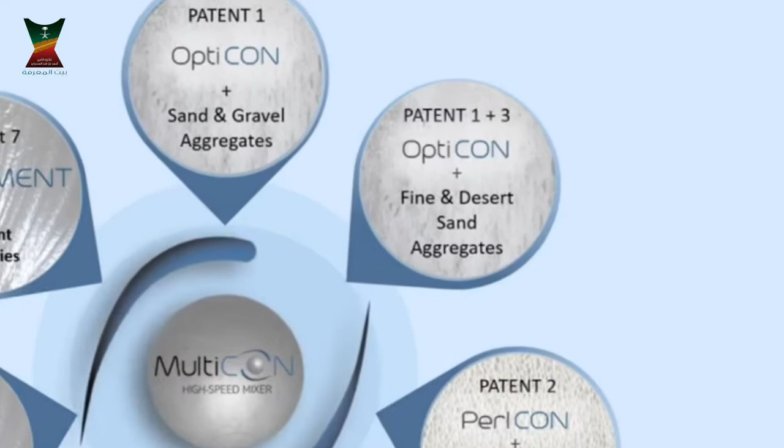That is with normal conventional aggregates like sand and gravel, natural materials. The second project is also Opticon, but now we use aggregates made from desert sand.

The second option is using desert sand in concrete technology. The third project is PerlCON, lightweight concrete with characteristics like normal concrete.

It's especially important in earthquake zones, because earthquake moment is swinging mass, and we reduce the mass by 30%. This reduction helps mitigate earthquake damage and also saves 30% of construction costs.

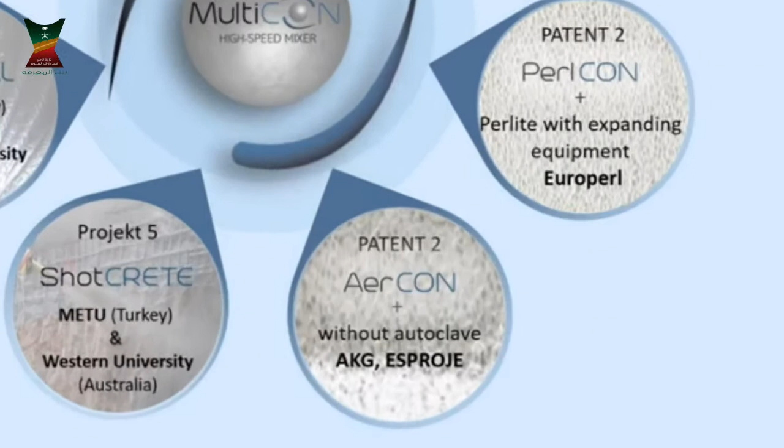This is our AerCON product. You know this concrete in your country as AAC - autoclaved aerated concrete, the lightweight foam concrete.

In our production method, you don't need autoclaves - the drying ovens. You save 60% of the investment cost with this method and save a lot of energy.

This is our Shotcrete product. Shotcrete is sprayed concrete used for underground applications or restraining tunnels and mountains, and underground buildings.

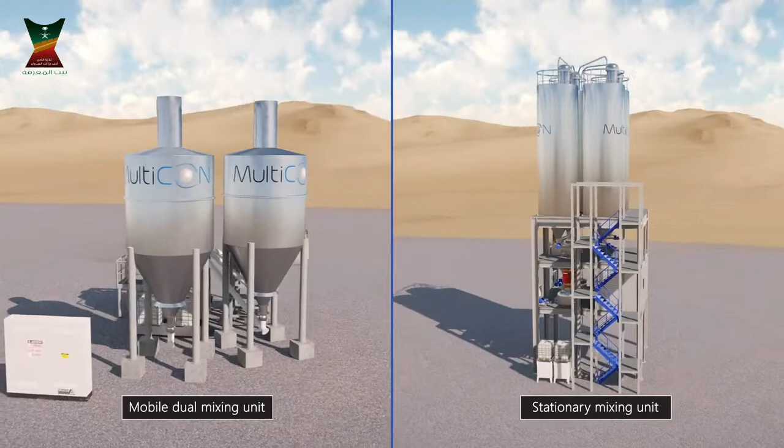At the core of our center is our MultiCON technology - the central mixer. You can see our mixing plants, one mobile and one stationary.

How we make this very good, green, environmentally friendly concrete - we call it a dual mixing system. In the first step, we make a suspension, then in a second step we put it into a sand and gravel mixer. The first mixture is done in a fast mixer, and the second mixture combines the material with the gravel.

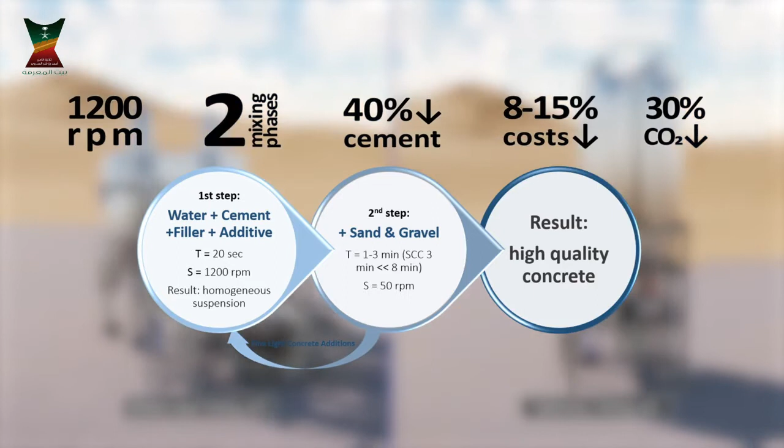You can see this runs at 1,200 to 1,500 rounds per minute, in two mixing phases. This saves 40% of cement, 15% of cost, and reduces CO2 by 30% - that's the liquefying effect which gives us the chance to take out the water.

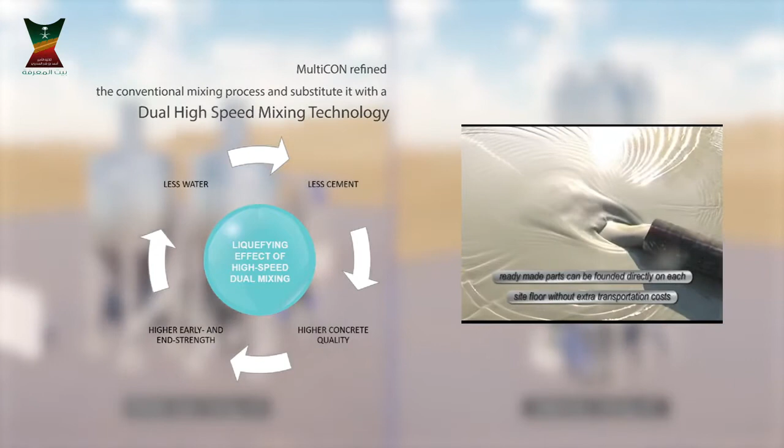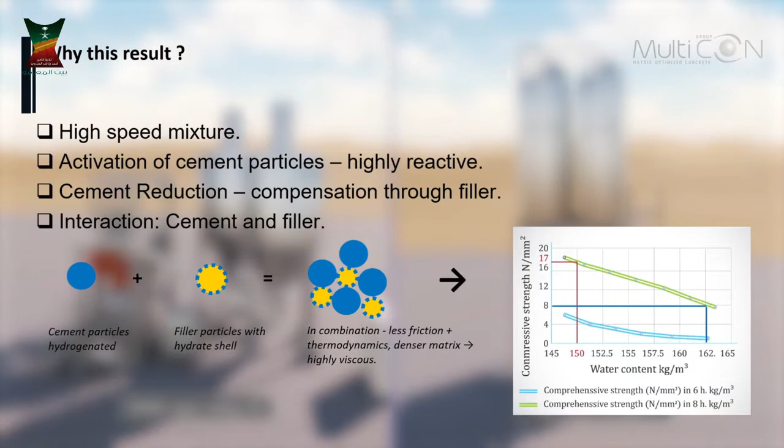That is the water saving. It's too technical, I won't explain this further for you. You have the CO2 saving, which is very important for our environment.

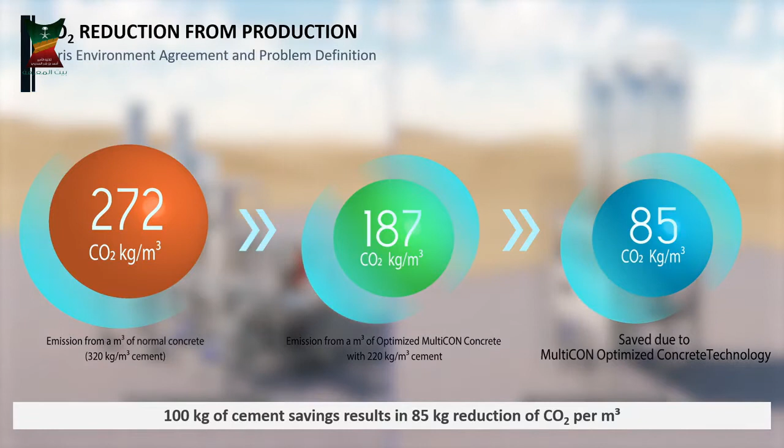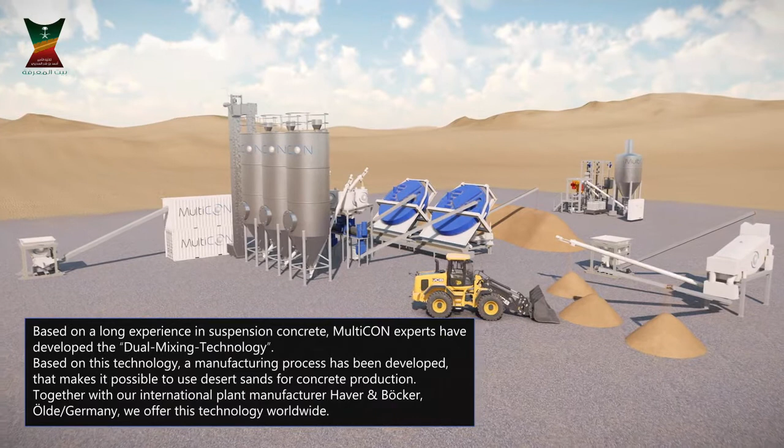Now what I'd like to show you is the interesting methods and patent. It's a patent for using desert sand in the concrete field. You can see this equipment is a mobile production station for using desert sand in concrete.

Why can we not use desert sand for concrete? The sand is too fine, too small, too round, the geometric form is too round or spherical, and the surface of the grains is too smooth, so it's usually not used in concrete.

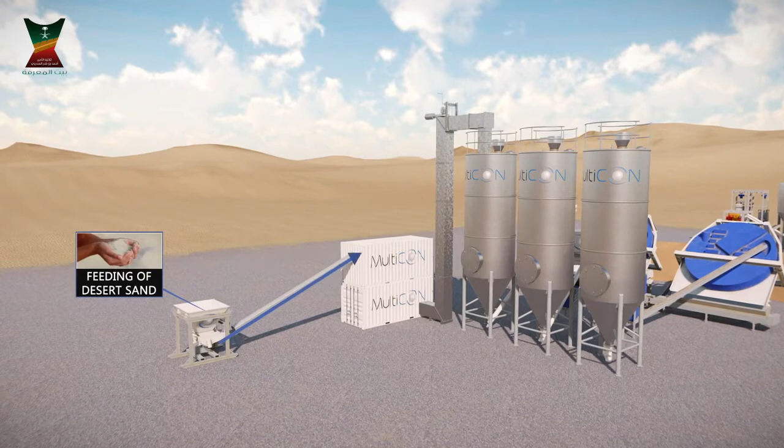Now I'll show you the procedure for how we convert this into building materials. The first step is feeding our container with desert sand and putting it into this container. Inside this container are roll mills for grinding the fine grains of desert sand to reshape them.

Because of the structure of desert sand, its round grains are not good enough for concrete in their spherical shape. We destroy this sand structure, breaking it and re-grinding it, and we make a very fine sand powder.

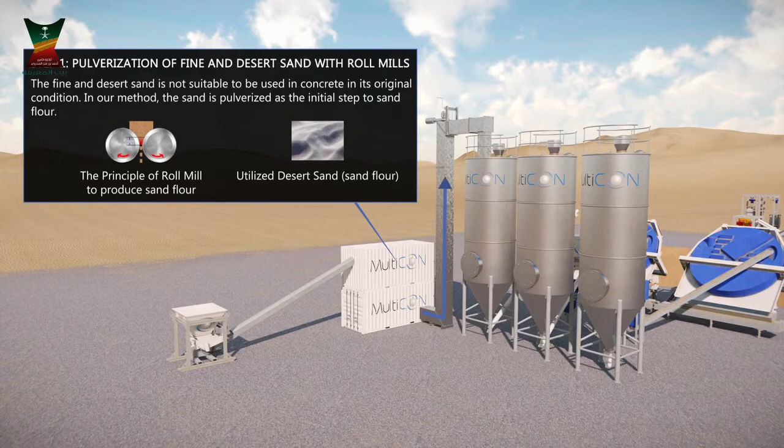This sand powder we put inside silo one. In the next silo we have cement, and in the third silo we have limestone.

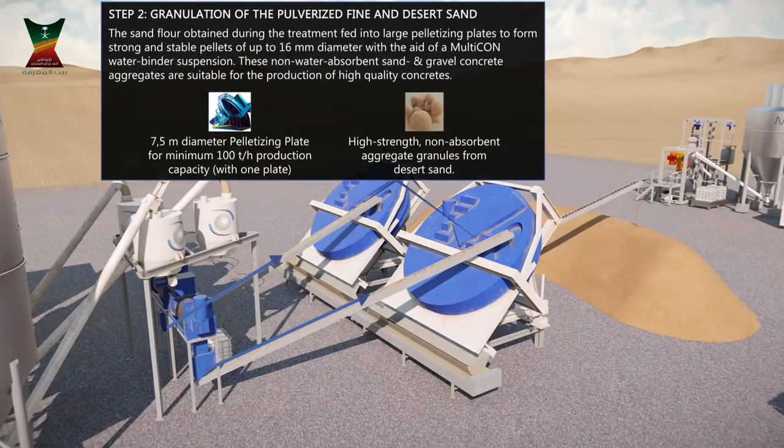We need for this round about 4-5% of cement and limestone to produce it.

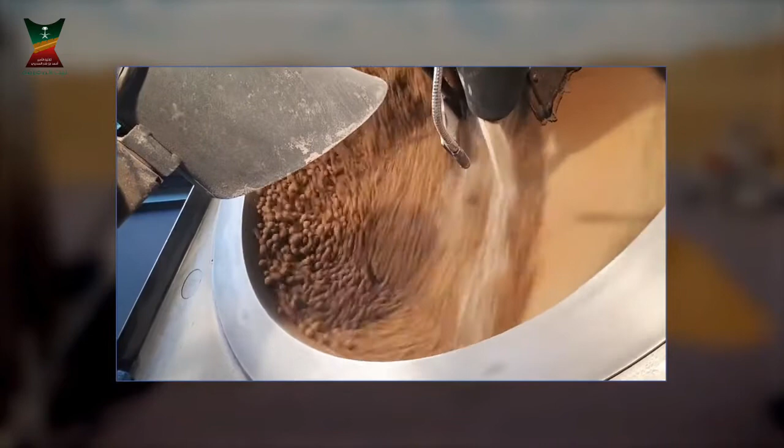You can see the pelletizing procedure here - how the small granules are manufactured. It's a very simple method to make the granulates, and what is very important is that you can decide the size of your granulates.

We have, for example, one situation in Bahrain - they have sand but no gravel. They bring gravel a long way from Saudi Arabia or from Oman. Now they can make their own gravel from desert sand using existing sand.

That means you can really make a tailor-made aggregate - concrete-specific gravel made from sand.

So why are we here? Because Saudi Arabia is a very strong country, and we would like to start this technology with you, because we need your support. We cannot show you in your country how to make concrete without a partnership.

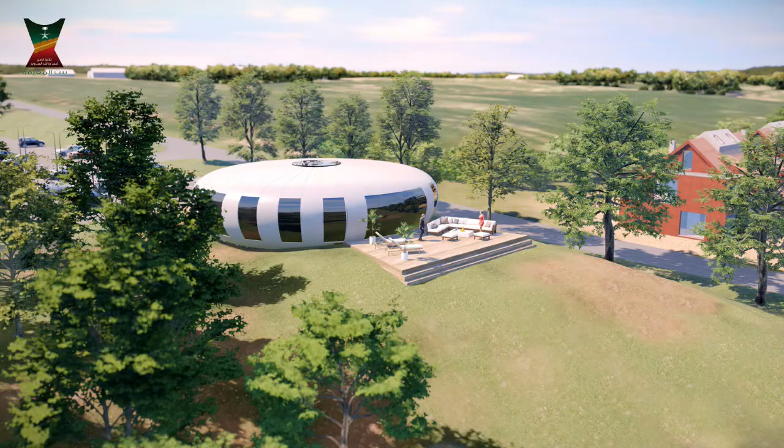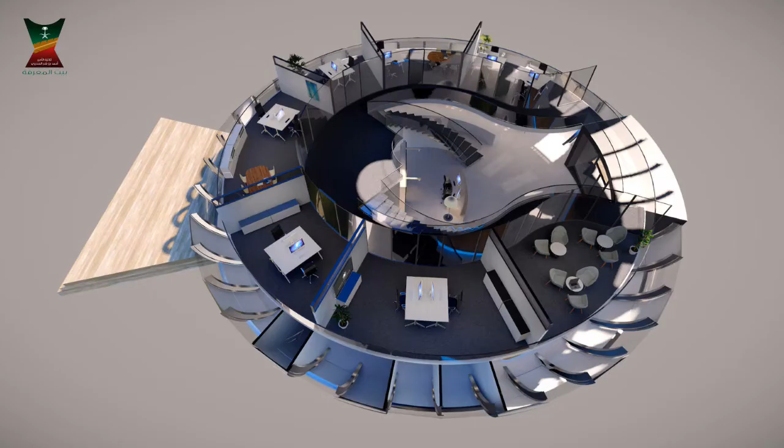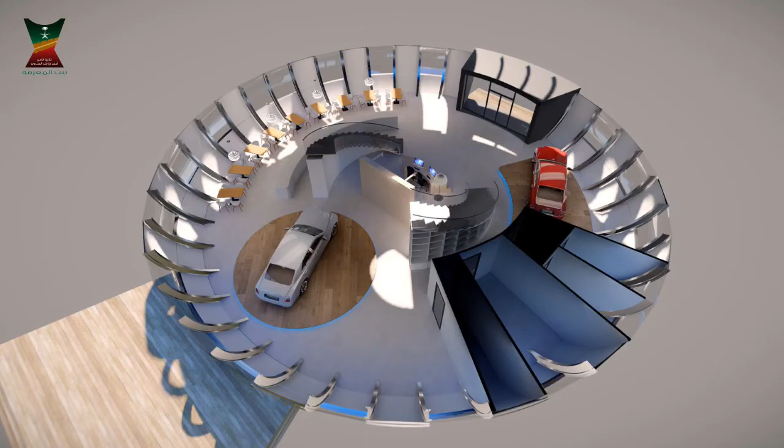This is the version made for Austria, and we modified it for the Prince. I'll show you now the Prince version.

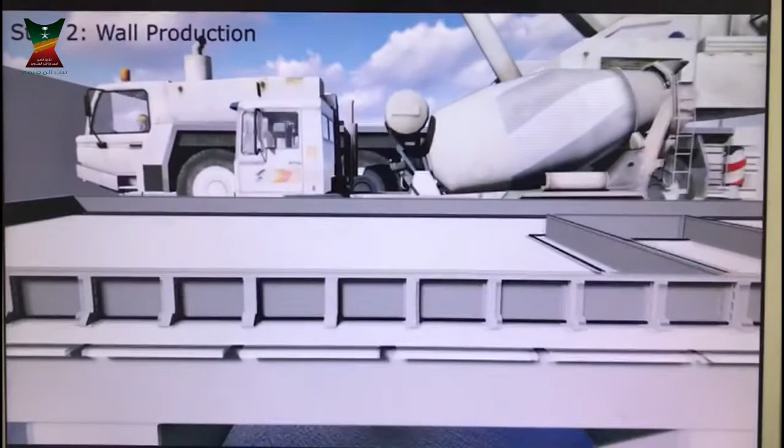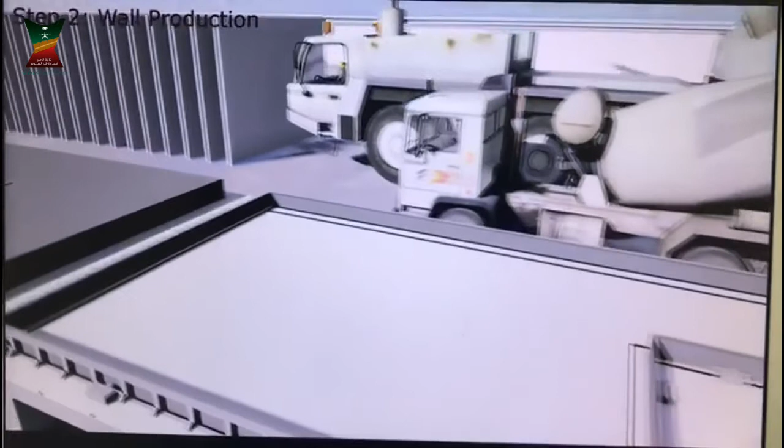I want to show you this short video. You can see this is our design department. We get the drawings from the architects, do the elementation, and then this is the panel on the mobile factory, which can be 150 or 200 meters long, with 1, 2, or 3 lines. All the equipment you see in this animation is ours, like magnets, shuttering, formwork. So we bring the full solution on site, and then we do the casting of each panel.

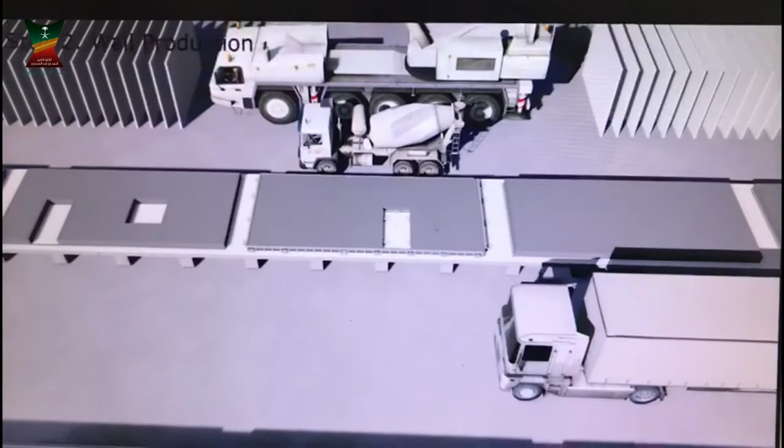This is a wall panel with a door opening as a sample. Right after casting, because Saudi Arabia has hot weather and sun, we cover this fresh concrete with the next table, like a table, and we put a drawing on it, a 1-to-1 plot file, so our engineers can immediately see where to put the next wall.

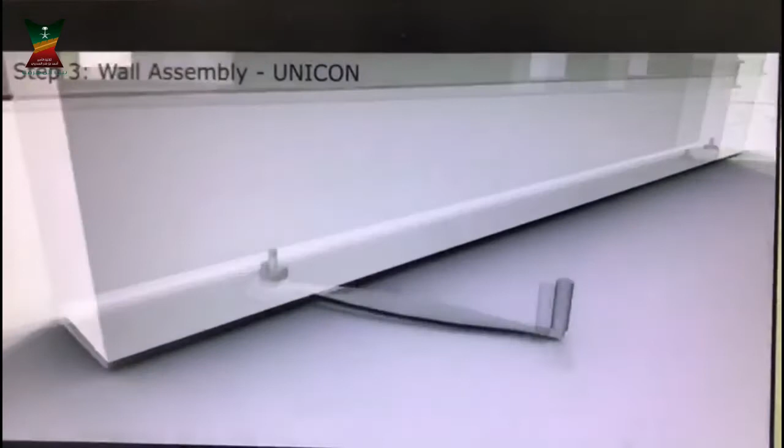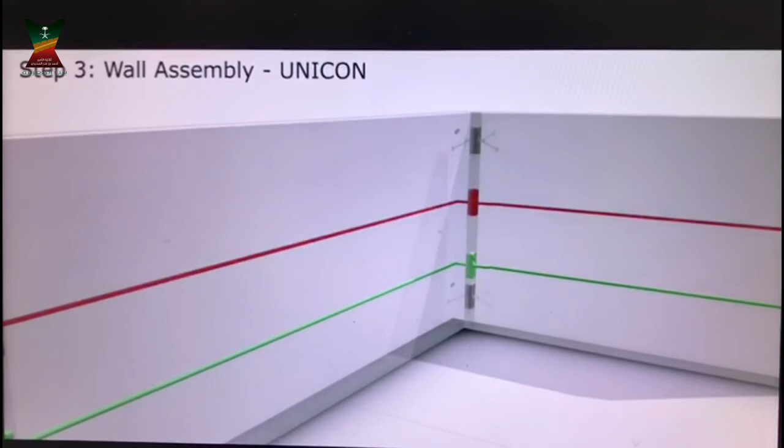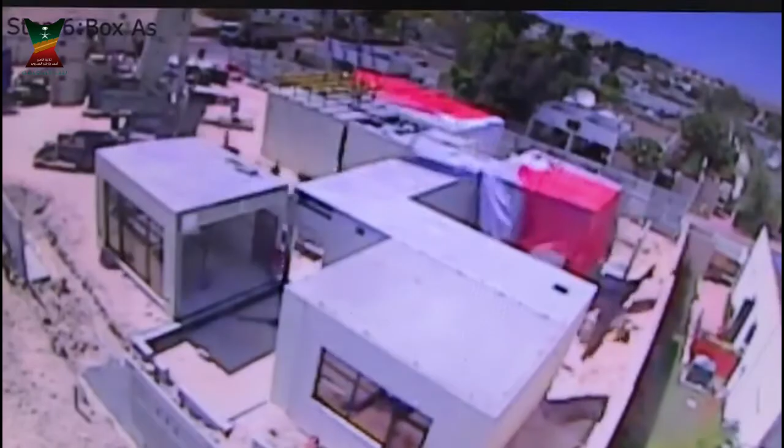After this, we do the assembling on site. The Unicon system helps us adjust precisely, millimeter precise, each wall from the bottom, with structural connections from wall to wall, plus water and electric connections, and we do panelized homes. We can also do modular units, fully finished bathrooms or living rooms in one box, complete with tiles, painting, floors, and lighting, and at night we can ship this room to the site, only 50, 100, or 500 meters from our factory, using heavy cranes to assemble these boxes. Sometimes we do only boxes, sometimes boxes and panels together, a mix of panelized precast and modular, and a villa can be finished in one day.

So that's our goal, to make building houses as simple as baking a pizza. Thank you very much.